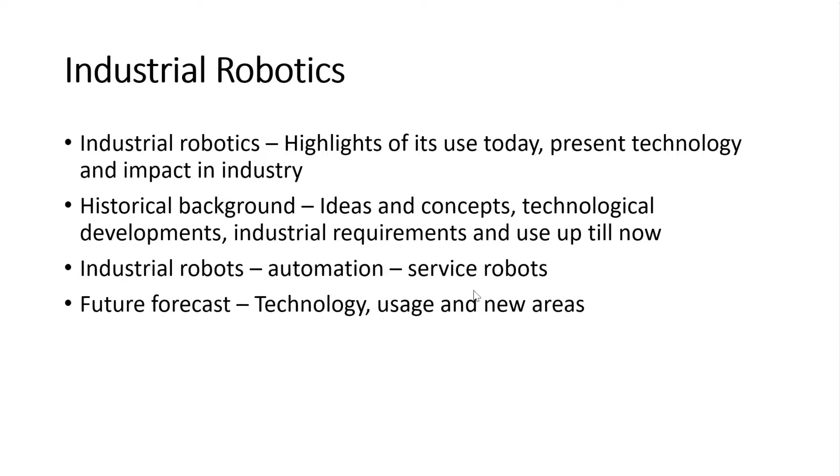So industrial robotics, the highlights of its use today, present technology and impact in industry, and some historical background related to that. We can also conclude that if you look at industrial robotics automation, there is some relation to service robotics and vice versa. Service robotics has taken another path from the beginning, but they are merging together more or less from a technology point of view.

So what are we looking for when we look at automation and using robots in factories? What to think about is low-cost products, and we move towards a varying capacity for different types of products or variants of those products. And when we look at premium and high-end products, we look at high quality.

Basically, we can see that if we have low-cost products with extremely high volume, maybe robots are not the first choice. We use special dedicated machines. But on the other hand, if we increase the number of variants, decreasing the total volume of that variant, that makes it difficult to produce in dedicated machines, then robots might be a good solution.

So what is happening is that we have high volume products with variants in many cases, not all, but in many cases. We might have low volume products with frequent changeover, and we have varying market requirements, local and global. These aspects create some challenges for any manufacturer, I would say.

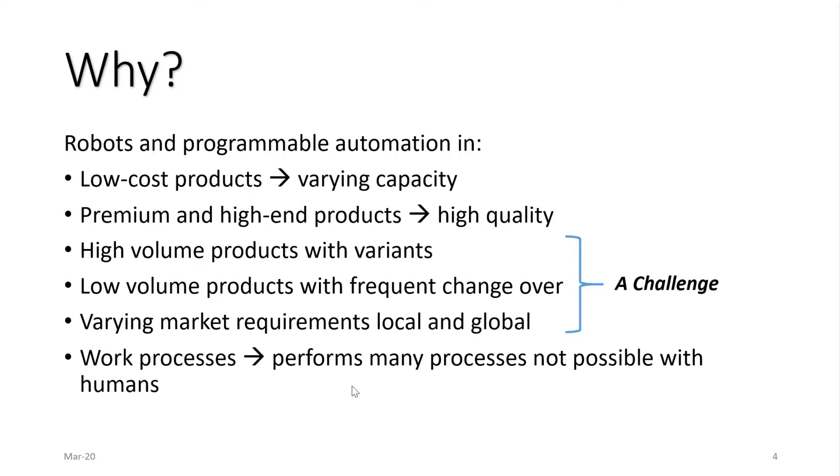So I will provide some examples, some keywords relating to the use of robots, or when the requirements from the manufacturing system is in a way that we think about robots, relates to flexibility. Flexibility meaning the use of what we are going to do actually is changing over time, so it's flexible in that sense - flexible in the use of machines, tools, processes, and the operation of that.

The capacity is variable, on demand, meaning that we only produce what we can sell and deliver to the customer that is paying for that. And if there is no demand, we hold.

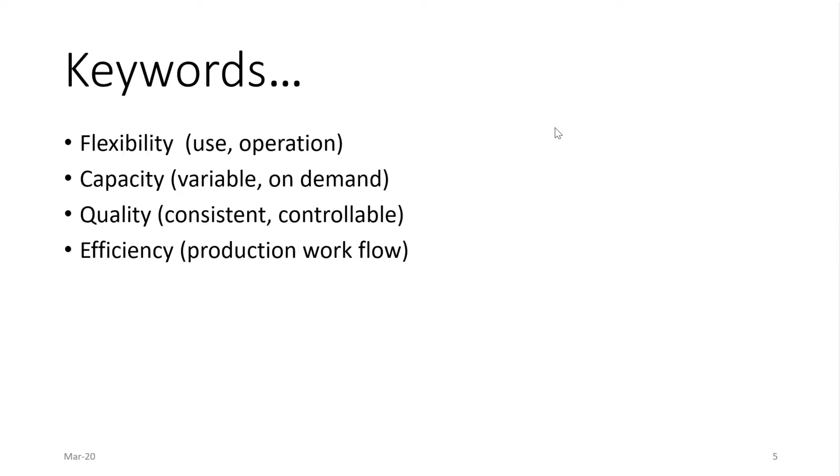Quality, to produce at a consistent and controllable quality. No bad products - this consistent quality is really important. Efficiency, that we have a production workflow that really works in an efficient way.

So industrial users and use. Some examples - of course in robotics we talk about automotive industry, cars, trucks, and so on, with processes like spot welding, arc welding, gluing or dispensing, spray painting, assembly, for example. Electronics industry is, together with automotive, the biggest users of industrial robots.

That can be assembly of electronic components, packaging. Packaging comes at every branch actually, but with electronics there's so many products that have to be packaged. Food industry - pick and place, packaging, providing a clean environment, really important. So just a few examples of how it can look.

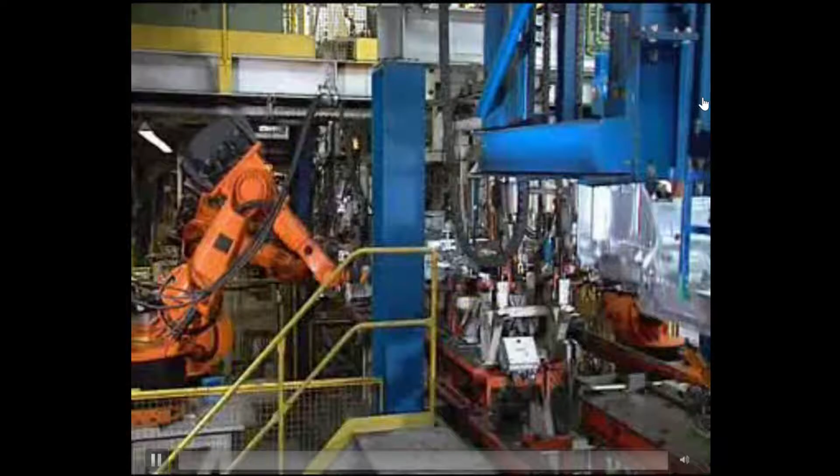This is from automotives, so we have spot welding and production line moving forward, and the robots are standing still, and usually there are many robots, as many as you can place at those places, doing spot welding at the same time at several places.

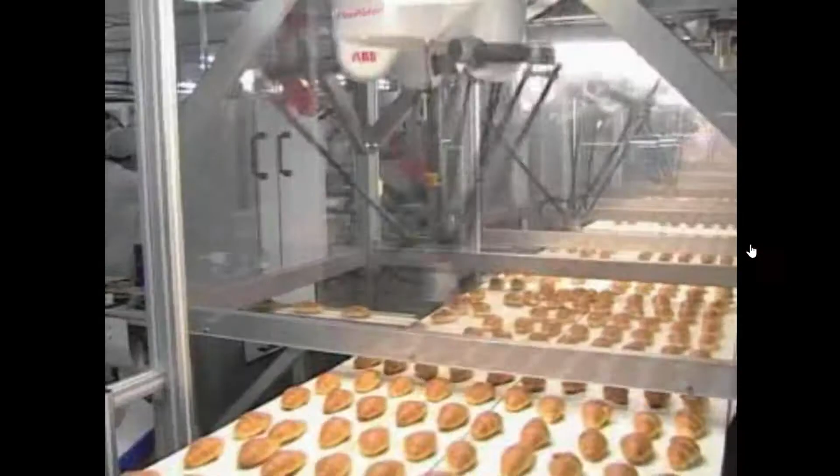Pick and place - this is a Delta type robot picking croissants or cookies or whatever at a very fast rate, typically one croissant a second or something like that. And on the line, you pick as many robots as you need to pick what is baked or made. In most cases there are vision systems that guide the robot to where to pick. Packaging.

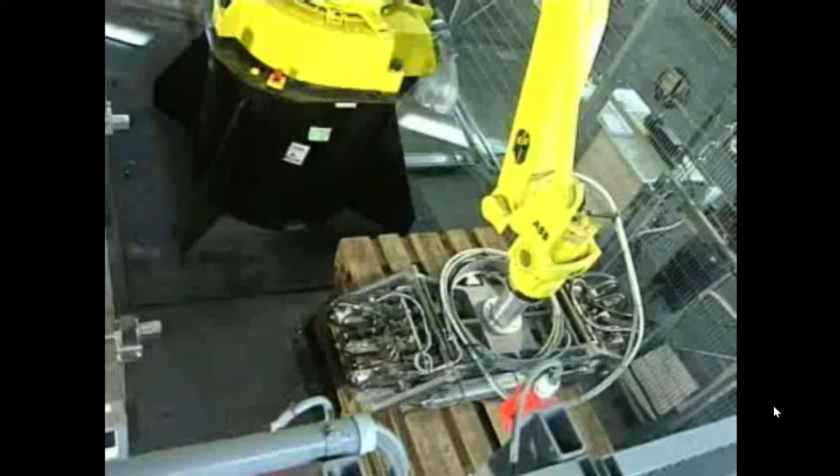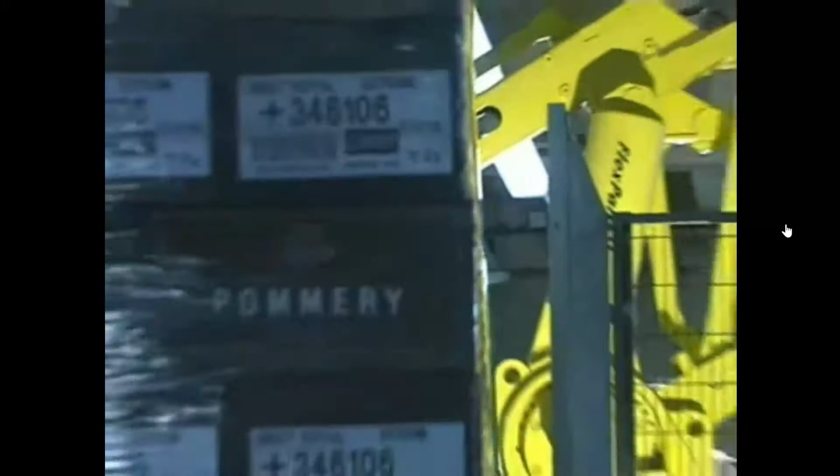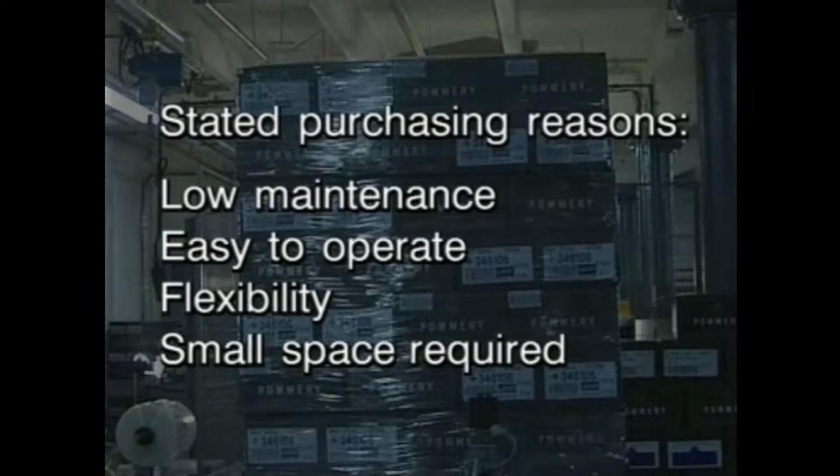Handling and packaging together. This is picking heavy parts like liquid, in this case champagne, and that is typically a very good example of where to use robots. Heavy objects in large volumes, and they are similar in shape.

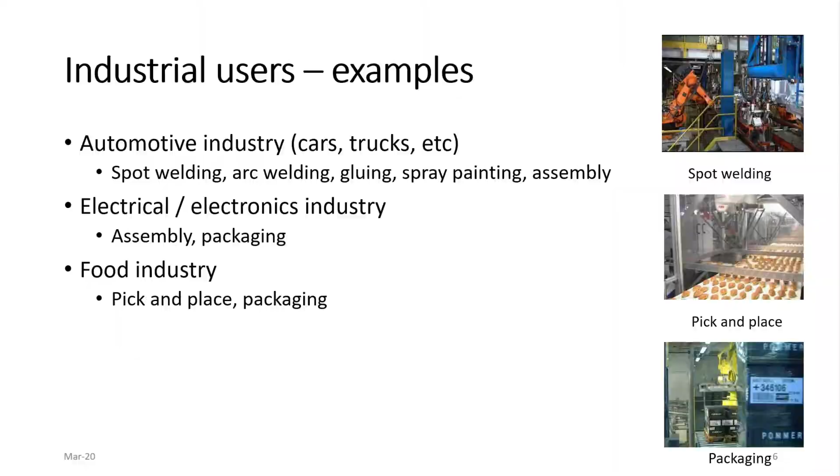So what is difficult? Small series variants. That calls for reconfiguration, reprogramming, or managing a lot of things within the same systems. So we need a more flexible, adaptable system that gets more complex in a way.

Collaboration. Collaboration means co-work or working together. Several robots, or robots and humans, in different kinds of setups. That creates complexity. Simple tasks made easy - in a way, that is easy to say, but it should be that simple tasks should be made easy to operate by robots.

But in most cases, there is always a setup time for any task, even the simplest one. So it's extremely important to make simple tasks made easy in minutes. And complex tasks, of course - complex tasks tend to be very complex in time. But we'll come back to that.

Manufacturers, some examples: Yaskawa, Fanuc, ABB Robotics, KUKA. Those four are the big four, in the sense that they are the biggest producers of any kind of robot, or most kinds of robots used for most applications in industry.

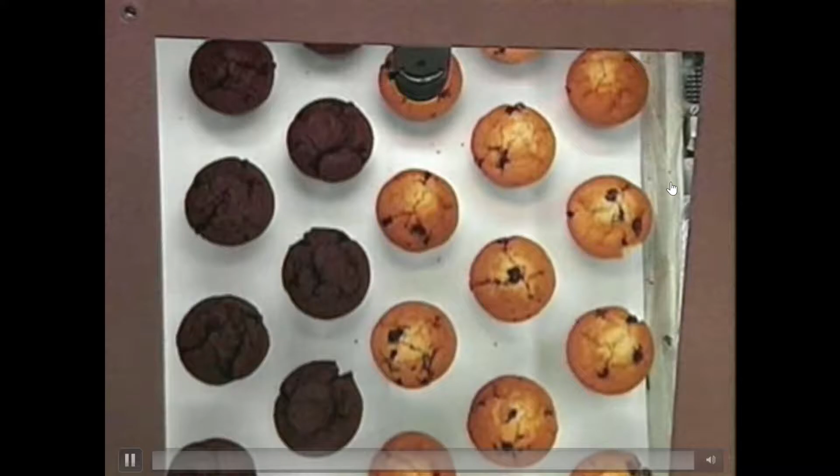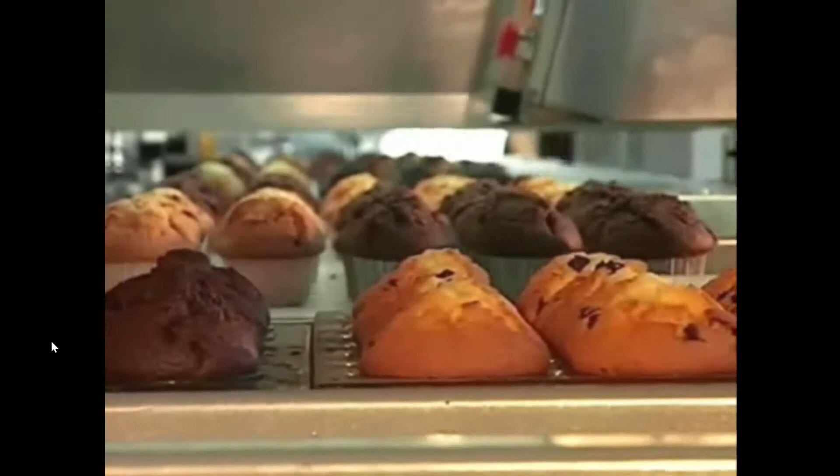Some examples here: picking muffins. They use vision systems to guide the robot, and as for the former example with the Delta type robots, have dedicated robots for that kind of picking. One might think that faster is better, and that is true, but there is a limit to how fast you can actually pick things like a muffin, because if you pick too fast, it will be destroyed. So one has to be delicate with these kinds of objects, really, really delicate, and the control of the motions has to be delicate so they maintain the shape.

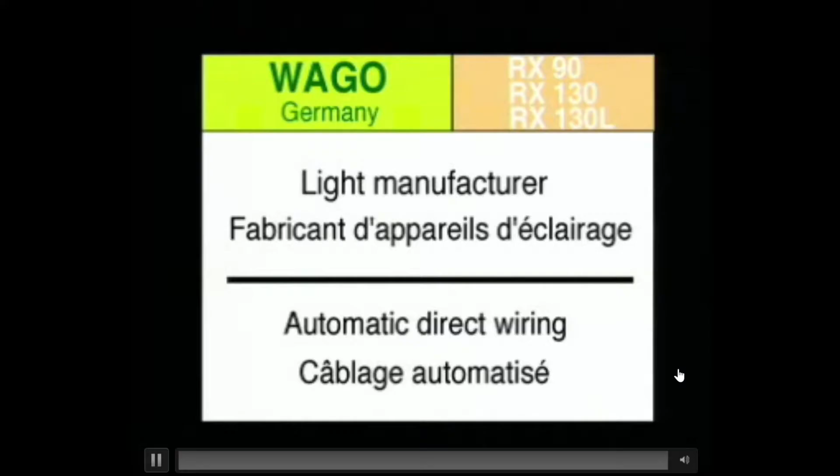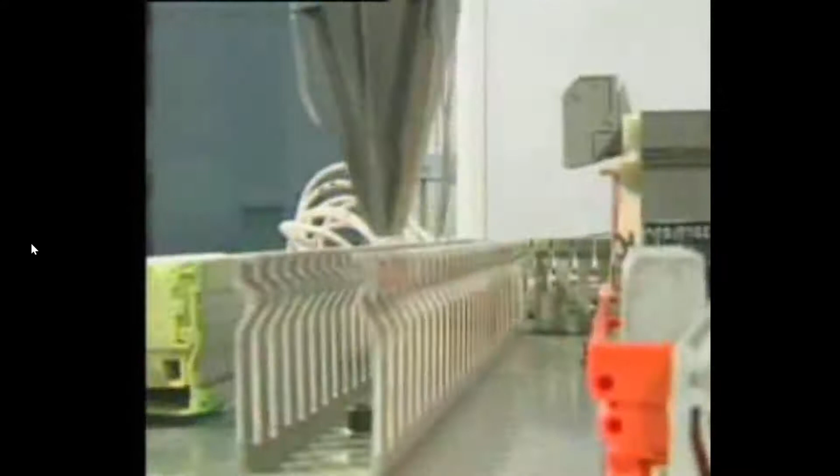Automatic wiring, that is a special interesting case with also a kind of challenging object. One doesn't think about wiring being done by robots, but that can absolutely be done, and it's quite interesting that things like quality could be enhanced, because what is programmed with the robot in this case, it will actually do.

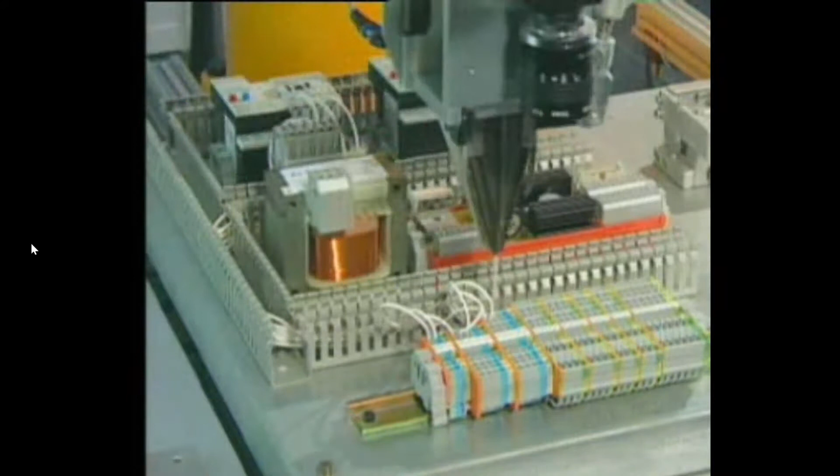There are no mistakes done. But if a human is doing these kinds of things, it's quite easy to understand that mistakes can be made, and there will be some errors if the wiring gets wrong in some places. So this is pretty interesting.

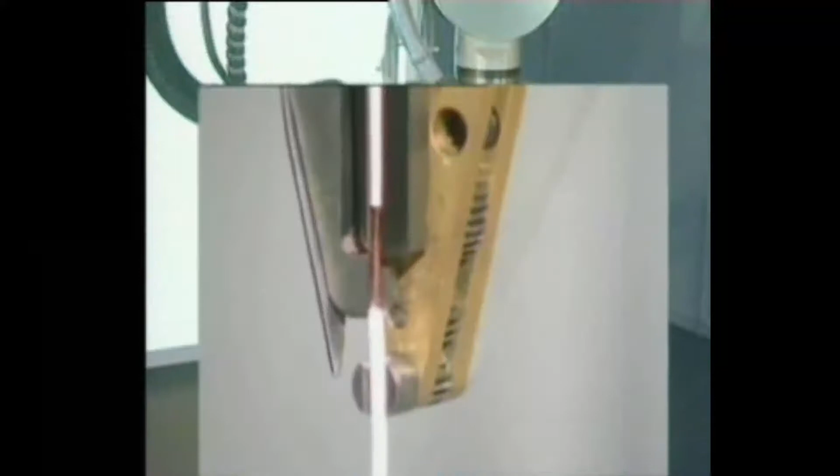So, developments and trends. Some trends relate to work process specialization - dedicated robots for certain processes. An example could be spot welding or spray painting. Tools, the same thing: welding tools, spray painting tools, or dedicated tools for polishing, grinding.

Methods applied - usually when we talk about certain processes, those have to be programmed, and then there are some wizards or methods developed related to programming those processes in an efficient way.

And then some general solutions and methods related to developing the technology as it is, related to increased use of sensors. That is a general way to see it.

The use of collaborative robots is increasing, and as a matter of fact, within the ongoing work related to standards for robotic safety, the term collaborative robot will be taken away. Instead there will be collaborative applications, because a collaborative robot doesn't really exist by definition. It will be collaborative for a certain application if it is safe for that type of use.

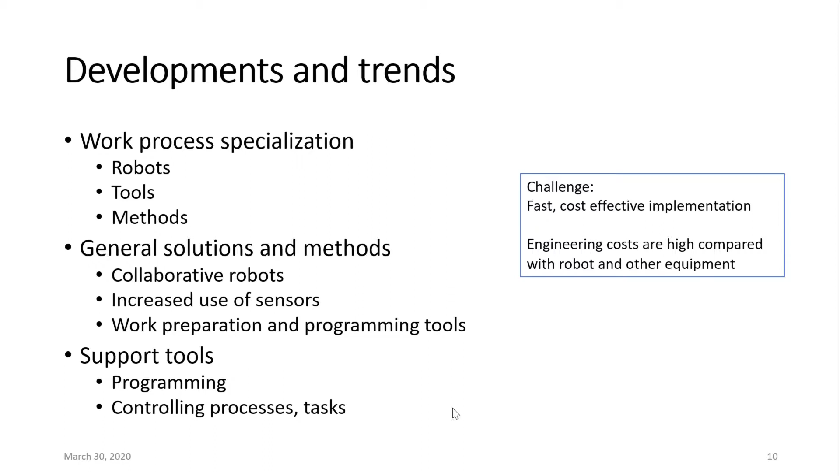Some examples of how it can look, from the Automatica Fair in Munich. I took these myself just to see how things look.

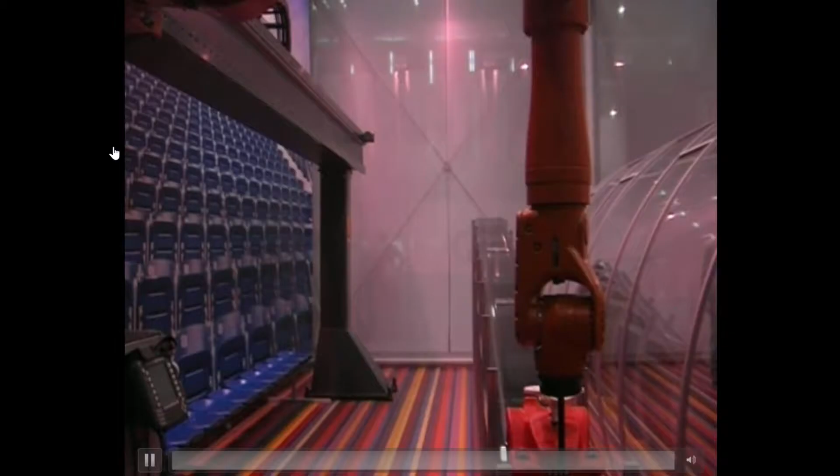This is a robot on a servo track, and at the same time also aligning its center point along other external things. Laser cutting.

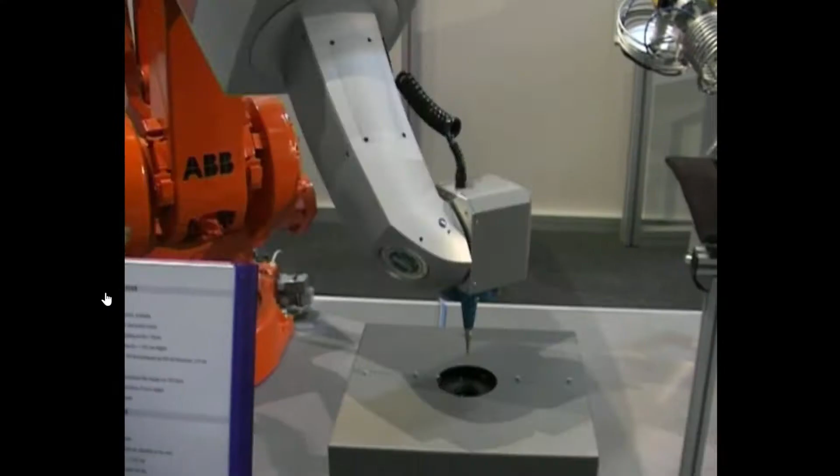The laser beams go through the robot arm, and there are different ways to do that, either by mirrors if it is a CO2 laser, or in a fiber-based laser system if it is a YAG-based laser, because they have different wavelengths, so it depends how you transfer the laser beam. Also, what type of laser you use depends on what material you want to process and for what purpose.

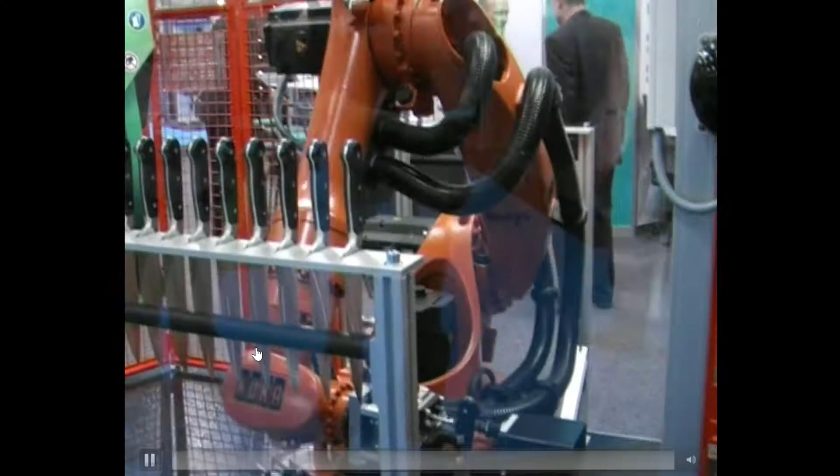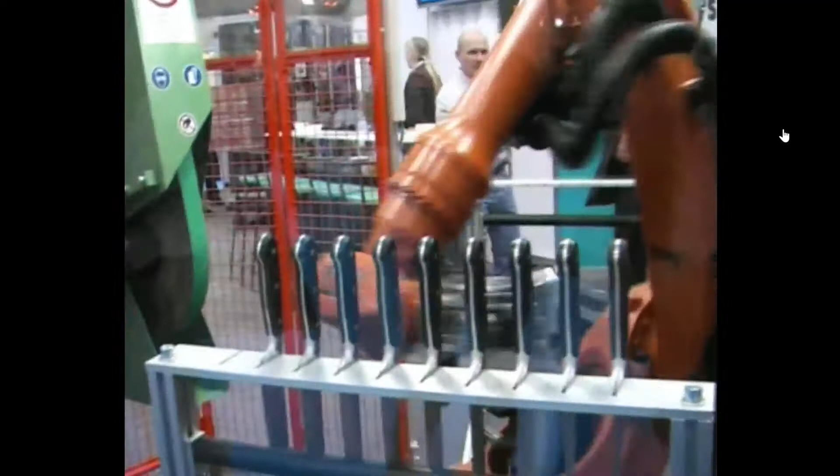Grinding, in this case there are knives to be grinded, and that is done in a quite nice way by a robot. The robot takes the knives and moves them towards different types of sand, different tools, to grind the knives and create a perfect edge.

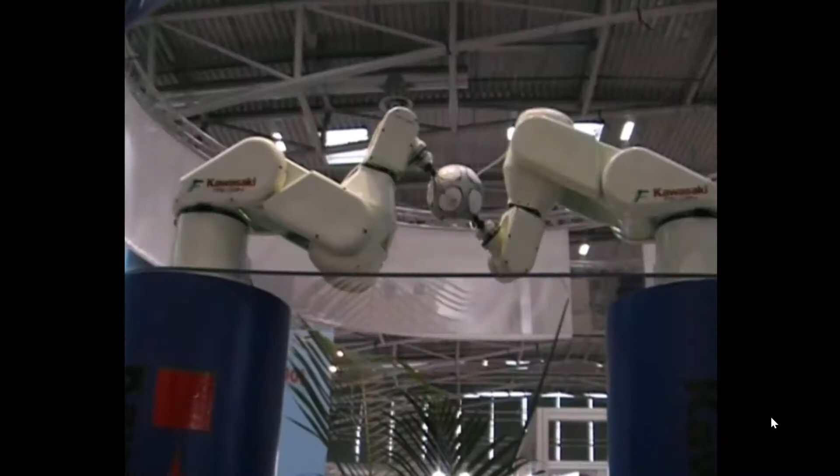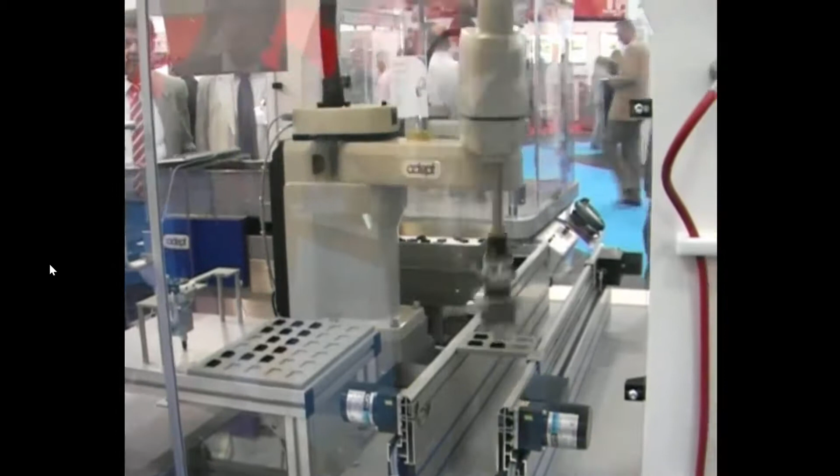Then we have the Scara type of robot, which is a 4-axis assembly arm. It has a speed similar to the Delta arm, but a different configuration, and they are adapted for different kinds of applications. But they could produce more or less the same kind of things in most cases. The Scara type of robot is 4-axis, apart from Delta, which is 6-axis.

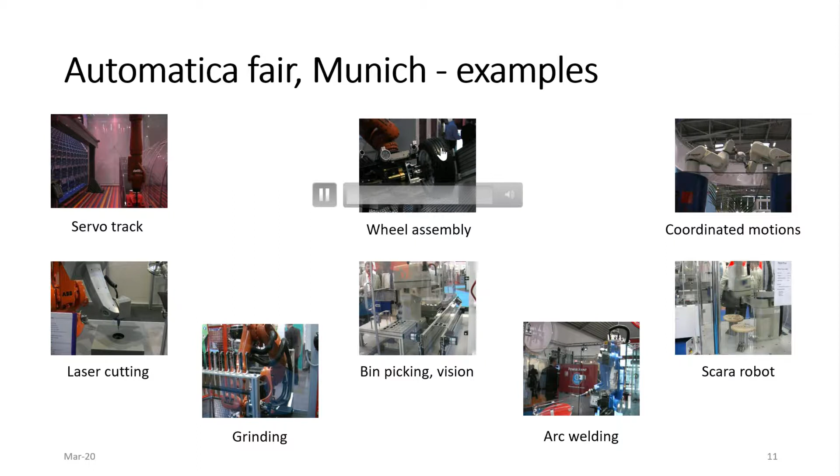This is an example of a very fast motion by the Scara type.

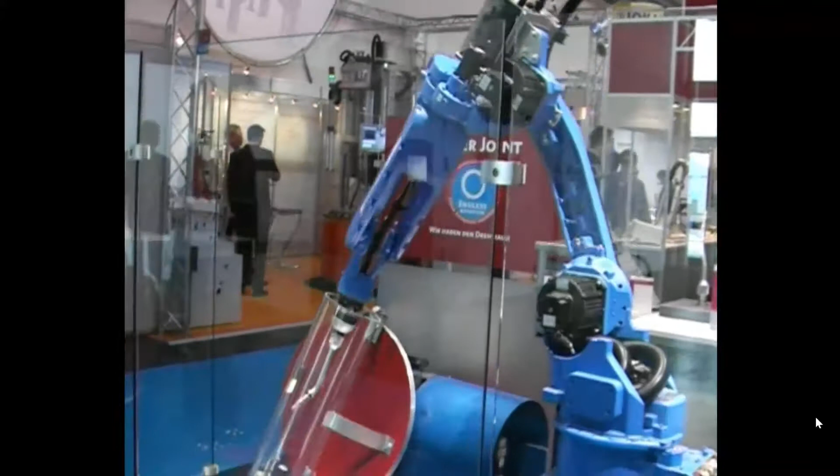Welding, arc welding in this case, also some kind of specialized robot developed for that purpose with a hollow arm design, so that most of the cable for the arc welding process goes through the robot arm or very close to the robot arm.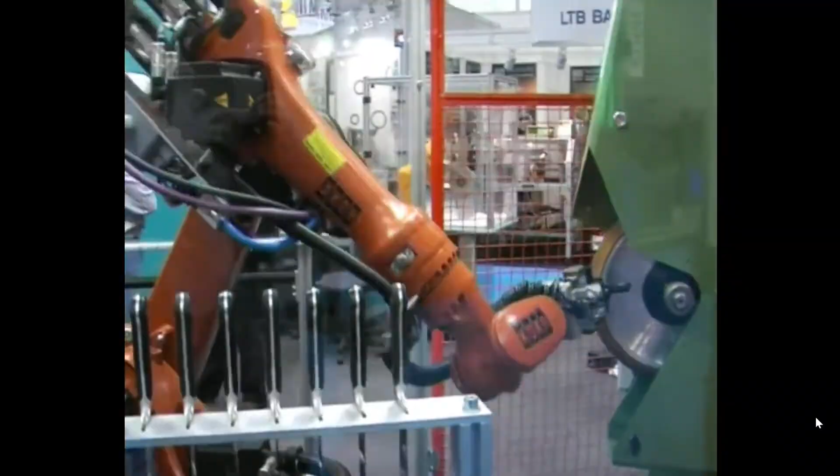Development of an industrial robot. The first patent of a robot was filed in 1957, but about the same time, or shortly after, there was a patent filed by George C. Devol.

From that, the first industrial robot was developed and deployed at a General Motors facility around 1960-61. It was based on servo drives, computers, and memory developed just after or during the Second World War.

In 1951, the first numerical control machine was demonstrated at MIT, and the driving force behind numerical controlled machine tools was the aerospace industry, to produce jet engines, for example, so they needed these kinds of machines. But for robots, the driving force was actually automotive car manufacturers, General Motors, Ford, and so on.

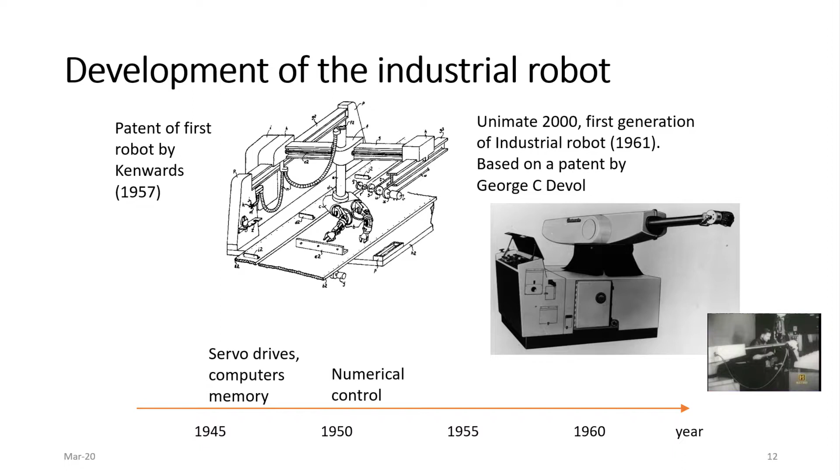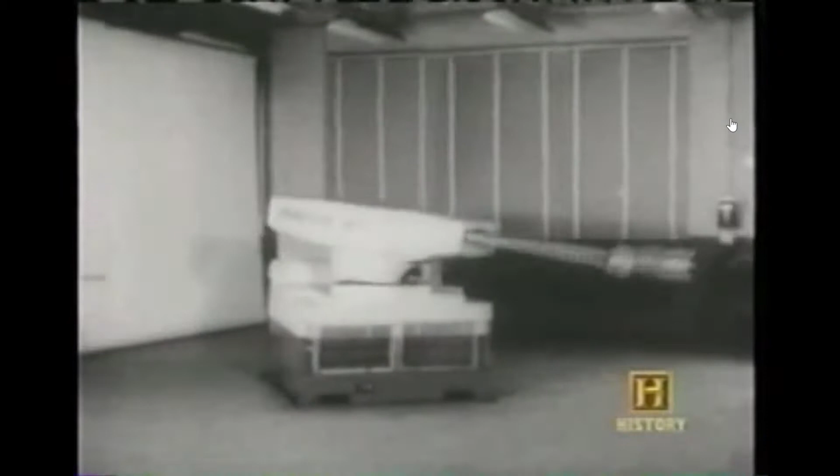It could look like this one. The Unimate was a hydraulic powered robot that looks like the turret of a tank, more or less. It was intended to take and manipulate hot metals from when you make motors for the car industry.

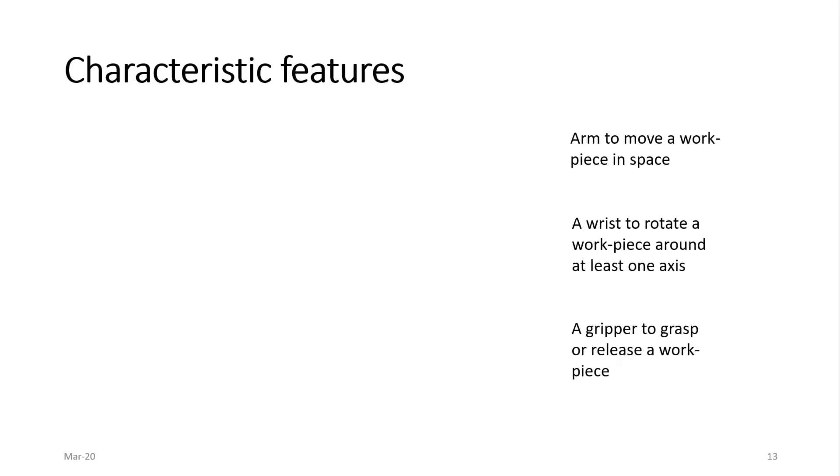Some characteristic features of those kinds of robots from the beginning: in principle, there was an arm to move a workpiece in 3D space, a wrist to rotate that workpiece around at least one axis, in most cases 2 or 3 axes, a gripper to grasp or release a workpiece, and enough load capacity, we talk about maybe 50 kilograms or more.

Manual control and programming possibilities, memory to record taught operation positions, automated control of instructions, movement speed not less than a human, and reliable operation. In principle, all of those could be accomplished at that time during the 60s, but also a low price—that is really a challenge to get working.

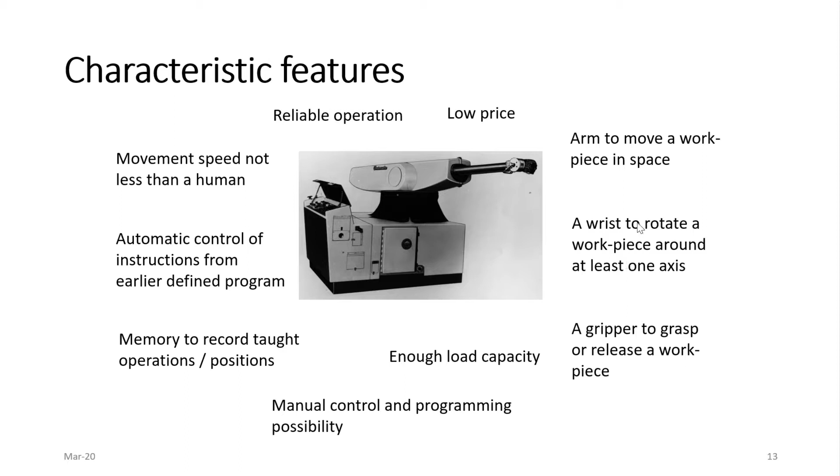So the uptake of robots during the 1960s was really slow, but still, it was evident that this type of technology should come. It was something for the future.

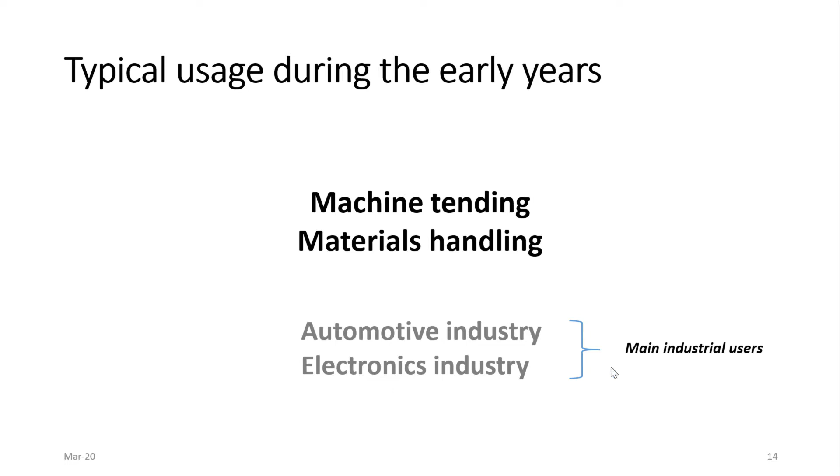The typical usage during the early years was machine tending and materials handling, which is essentially the same thing, but machine tending is actually materials handling for a machine, while materials handling is for anything like packaging or whatever it is. And then within automotive industry and electronics industry, which are the main industrial users.

Some benefits and driving forces are easy change of operations, even quality, less scrap, better work environment, flexible with respect to your volume you are producing.

Flexible in a way that if you think about it, if you have humans, operators, working in the factory, so if you're not selling anything, you have to pay for their salaries even if they're not producing anything, or you produce on stock and hope to sell it later. With robots, you can just shut down, and okay, the investment is still there, you have to pay for that, but you don't pay anything else.

You have no running costs if it's standing still, usually. And robots can cope with fairly complex operations. It really depends, because in some cases humans have the capability to do really complex things, but so do robots, and they are usually complementary - what the robot is good at, a human is bad at, and vice versa. For example, a robot can easily pick up things weighing 50 kilograms, hold it in a steady position within a tenth of a millimeter, whatever it takes, with no problems, and operate it in a very precise manner, which a human can never do.

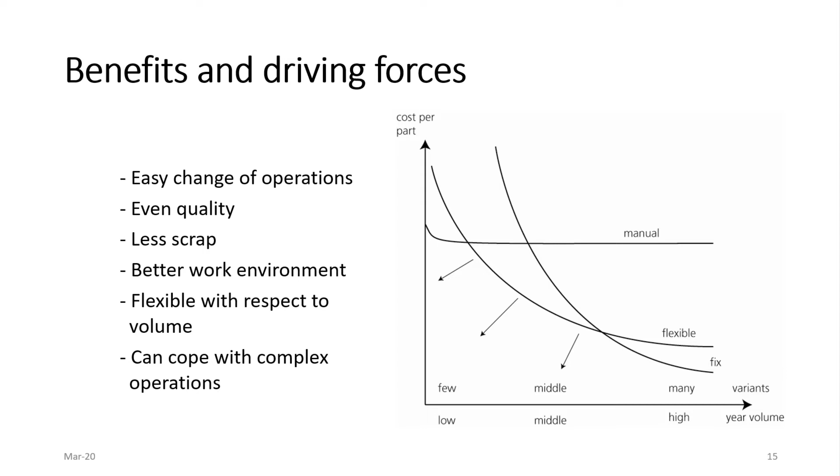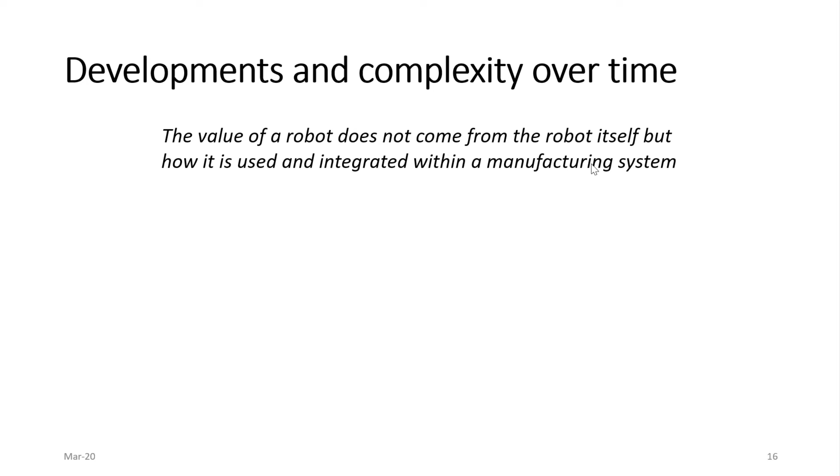And we can look at it another way, where we have developments and complexity over time. So the value of the robot does not come from the robot itself, but how it is used and integrated within manufacturing systems. If we think about this with flexible motion automation, where the robot replaces the worker, that's a fairly simple system. That was done during the 60s, 70s and 80s.

And then we advance to systems and information integration in integrated manufacturing systems, connecting many robots and other machines, quality assurance, quality control sensors, and so forth, with a high complexity. That was done during the 80s and 90s, and of course today also.

And then we think about controlling processes at a higher level of abstraction layer models. We have difficult tasks - we move into one-of-a-kind production or very low volumes, which can be done if we have model-based control. And then we enter what we call the Industry 4.0 paradigm, the fourth industrial revolution, which we'll talk about later.

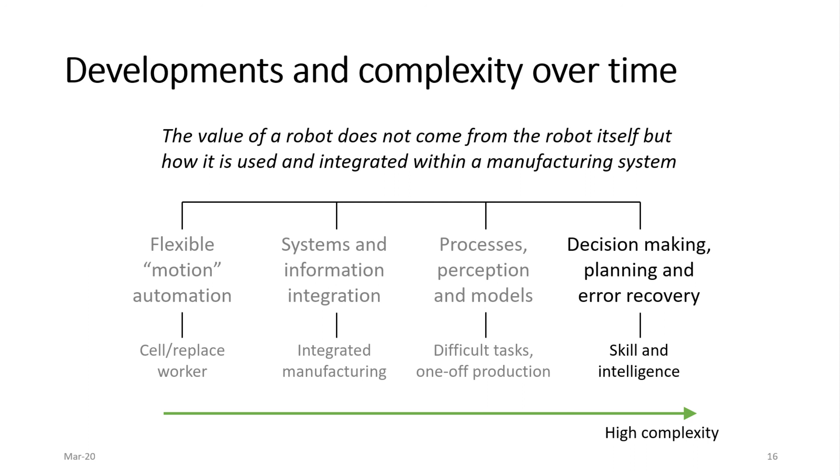And then the last, with the highest complexity, is really when we introduce decision making, planning, error recovery, and we have skill and intelligence within the system. In some sense, that is a part of research and development at the moment. In rare cases it has been implemented, but in general, we are at that place where artificial intelligence is coming within the next years, 5 years, 10 years from now, with a very high complexity of the systems, which will actually change a lot of things.